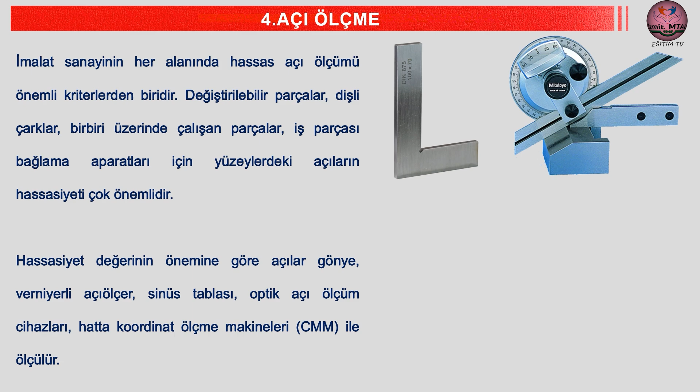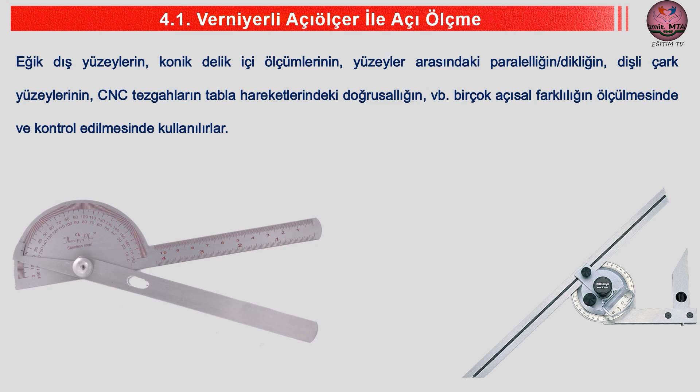Verniyerli açı ölçer ile açı ölçme. Eğik dış yüzeylerin, konik delik içi ölçümlerinin, yüzeyler arasındaki paralelliğin, dikliğin, dişli çark yüzeylerinin, CNC tezgahların tabla hareketlerindeki doğrusallığın ve benzeri birçok açısal farklılığın ölçülmesinde ve kontrol edilmesinde kullanılırlar.

Basit bölüntülü açıölçer. Bu tip açı ölçer genellikle markalama ve kaba bölüntüleme işlemleri için kullanılmaktadır. 180 derecelik ölçme aralığına sahiptir.

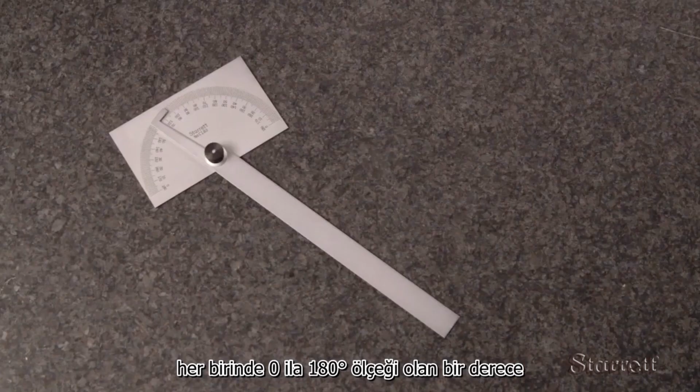The Starrett C183 steel protractor is a fairly simple tool which is great for determining or setting angles to within a degree. With a 0 to 180 degree scale in each direction, you can read both angles and supplementary angles directly. The flat back and square head add to its versatility.

You can use either side or the top against a reference surface to set or determine an angle. And probably most common, hold the bottom side of the head against an edge. The rust-resistant satin chrome head finish makes the marked graduations and figures easy to read. The lock nut securely holds the 6-inch leg in any position.

This aluminum block is being prepped for a machining center, but first we are going to lay out angles and cut off corners to shorten the cycle time. For each corner, use a rule and scribe a mark 1 7/8 inches from the end.

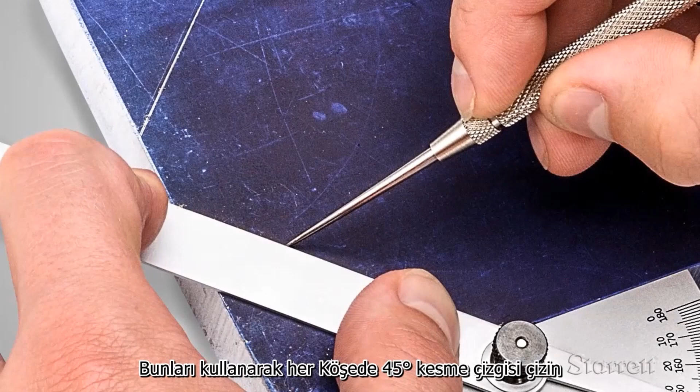Next, set the protractor at 45 degrees and lock. Then, using the rule mark as a guide, scribe a 45-degree cut line on each corner. Using these lines, you can safely cut off corners with a vertical bandsaw. After machining, each corner will have a 1-inch, 45-degree angle.

Here's another application. You can determine the included angle of a cutting tool tip by holding the blade against the tool shank and positioning the head against the cutting edge. The C183 is not the tool for inspecting precise angle tolerances, but it is accurate to within a degree, which meets many requirements.

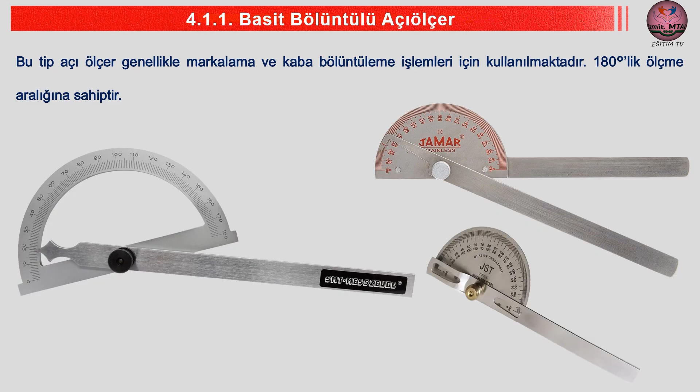Verniyer bölüntüsü, birer derecelik bölüntülere, diğer bir deyişle bir derecelik hassasiyete sahiptir. Büyük boyutlu olan basit bölüntülü açı ölçerler, Verniyer bölüntüsü 0,5 derece olarak da üretilebilir.

...54 derece, 126 derece.

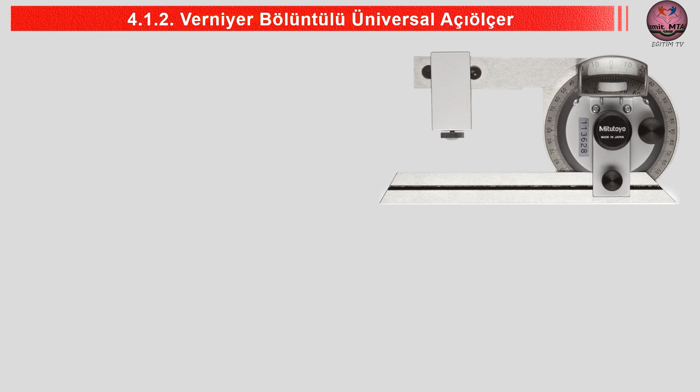Verniyer bölüntülü üniversal açı ölçer. Hassas açı ölçümleri yapmak amacıyla kullanılmaktadırlar. Çeşitli açı ölçülerinin elde edilmesinde ve okunmasında kullanılan hassas ve yüksek ölçme tamlığında olan bir ölçü aletidir.

360 dereceye kadar tüm açıların ölçümü yapılabilir. Dairesel açı ölçüm kısmı birbirinin devamı olacak şekilde 90 derecelik 4 parçaya bölünmüş durumdadır.

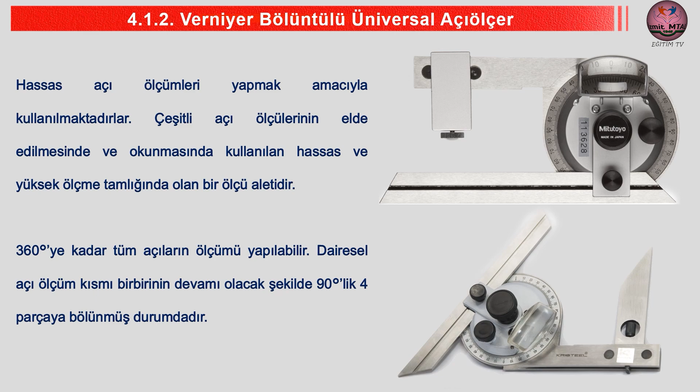Herhangi bir ölçmede elde edilen açının sabit kalması için sabitleme vidasından faydalanılır. Verniyeri 2 dakika ve 5 dakika olmak üzere iki farklı hassasiyette üretilmektedir. Dairesel verniyere bağlı ayarlanabilir açı ölçüm kolu açısal yüzeyle çakıştırılır ve sıkıştırma vidasıyla sabitlenir. Ardından açı ölçüm cetveli üzerinden değer okunur.

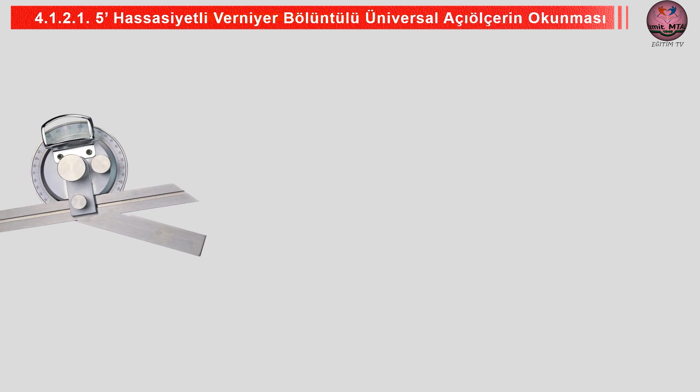Beş dakika hassasiyetli Verniyer bölüntülü Üniversal Açıölçerin okunması. Verniyerli kumpaslar ile aynı çalışma prensibine sahiptir. Açıölçerin hem ana cetvel hem de Verniyerinin okunması sırasında bölüntülerin ana cetvelde derece, Verniyerde ise dakika olduğu unutulmamalıdır.

Verniyer'in 5 dakika hassasiyetli olabilmesi için 23 derecelik açı, 12 eşit açı bölüntüsüne ayrılmıştır. Bu sayede 5 dakika hassasiyetli açı Verniyeri bölüntüleri elde edilir.

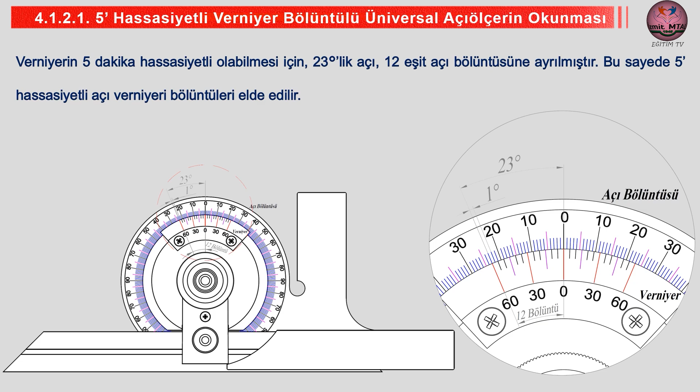Ölçülen değer eşittir: Verniyer sürgüsünün sıfır çizgisinin geçtiği ana cetveldeki açı artı, Verniyer sürgüsü bölüntülerinden ana cetvel üzerindeki bölüntü çizgileriyle çakışan çizgi çarpı hassasiyet.

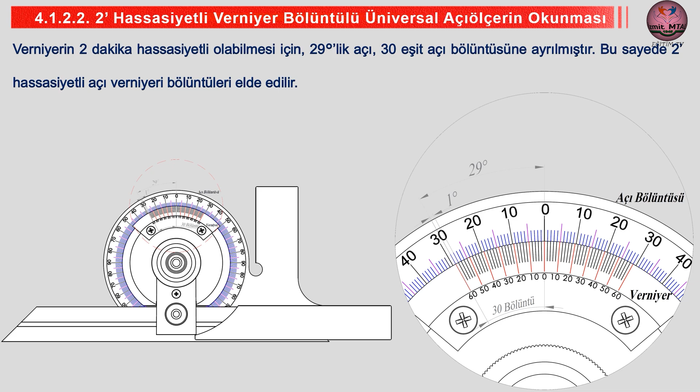2 dakika hassasiyetli Verniyer bölüntülü, Üniversal Açıölçerin okunması. Verniyer'in 2 dakika hassasiyetli olabilmesi için 29 derecelik açı, 30 eşit açı bölüntüsüne ayrılmıştır. Bu sayede 2 dakika hassasiyetli açı, Verniyeri bölüntüleri elde edilir.

Ölçülen değer eşittir: Verniyer sürgüsünün sıfır çizgisinin geçtiği ana cetveldeki açı artı, Verniyer sürgüsü bölüntülerinden ana cetvel üzerindeki bölüntü çizgileriyle çakışan çizgi çarpı hassasiyet.

40 derece artı 20 çarpı 2 dakika. 40 derece artı 40 dakika. 40 derece 40 dakika.

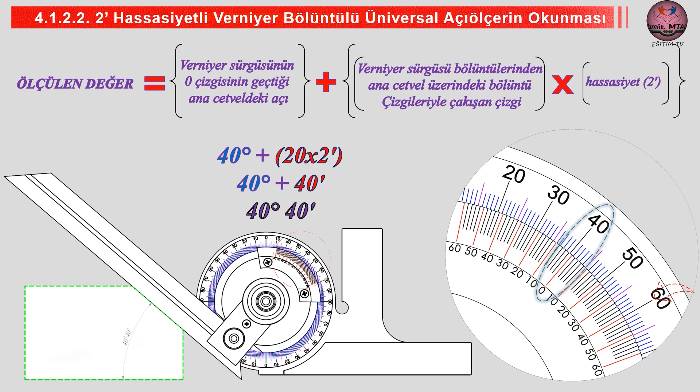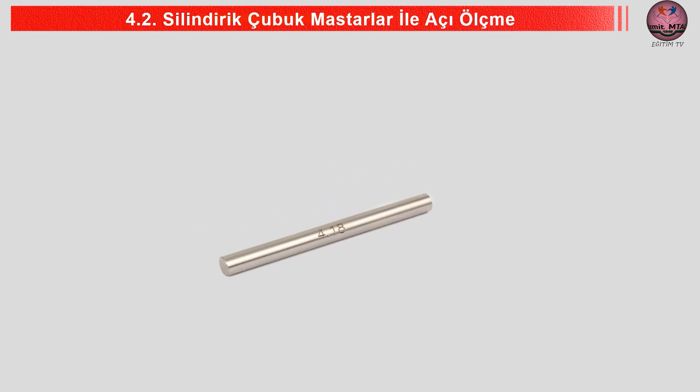Silindirik çubuk mastarlar ile açı ölçme. Silindirik mastarlar, iç deliklerin ölçme ve kontrol işlemleri ve kırlangıç kuyruğu ya da kanalların açı ölçümü gibi işlemlerde kullanılırlar.

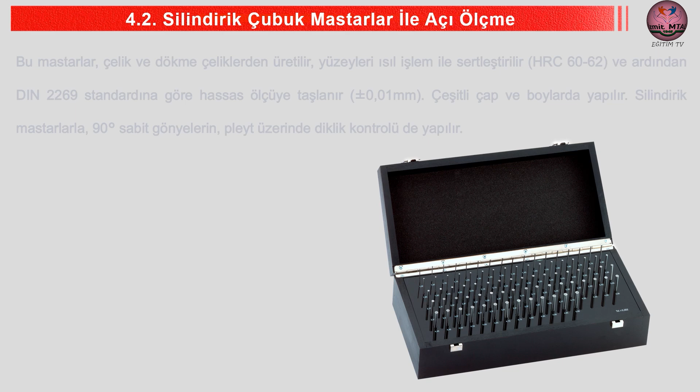Bu mastarlar, çelik ve dökme çeliklerden üretilir, yüzeyleri ısıl işlem ile sertleştirilir ve ardından DIN 2269 standardına göre hassas ölçüye taşlanır. Çeşitli çap ve boylarda yapılır. Silindirik mastarlarla 90 derece sabit gönyelerin plaka üzerinde diklik kontrolü de yapılır.

Mastar yardımı ile açı ölçümü için 2 adet farklı çap ölçüsünde silindirik mastara ve 1 adet blok mastara ihtiyaç vardır.

Silindir mastar yardımı ile açı ölçümü için aşağıdaki görselde gösterilen ölçülerin sırayla ölçümlerinin yapılması ve ardından tanjant fonksiyonu ile açının hesaplanması işlemi yapılarak açı ölçüm işlemi gerçekleştirilir.

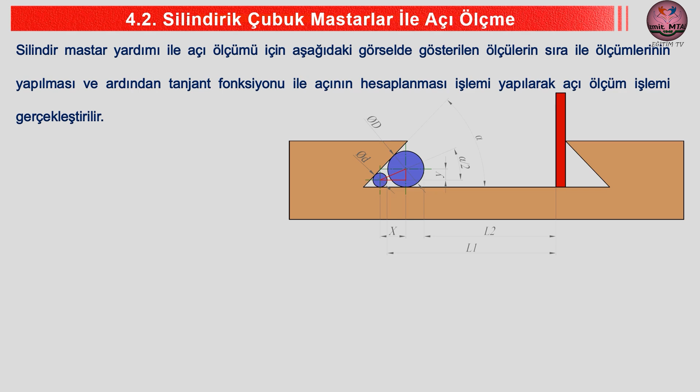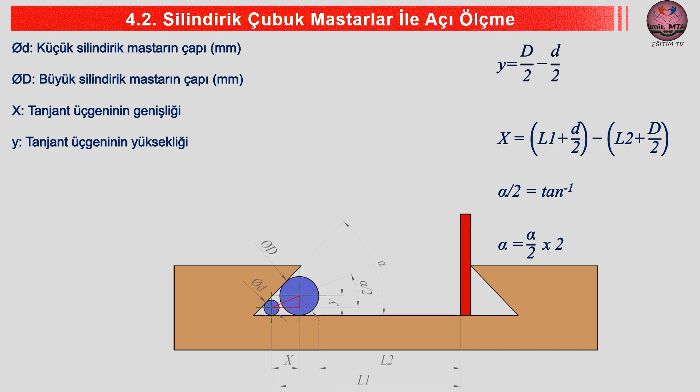d: küçük silindirik mastarın çapı. D: büyük silindirik mastarın çapı. X: tanjant üçgeninin genişliği. Y: tanjant üçgeninin yüksekliği. L1: küçük silindirik mastar ile blok mastar arasında en kısa mesafe. L2: büyük silindirik mastar ile blok mastar arasında en kısa mesafe. Alfa bölü 2: tanjant üçgeninin açısı. Alfa: ölçülmek istenilen açı.

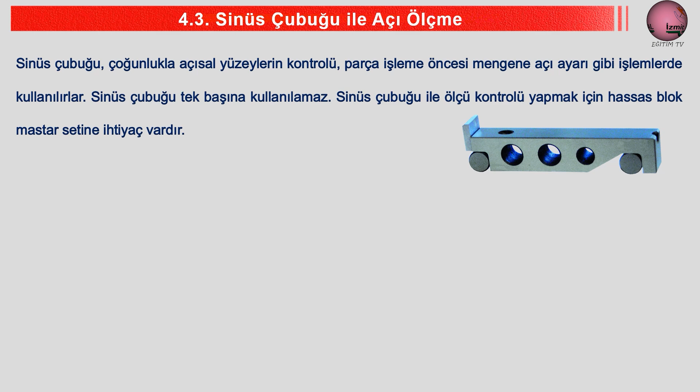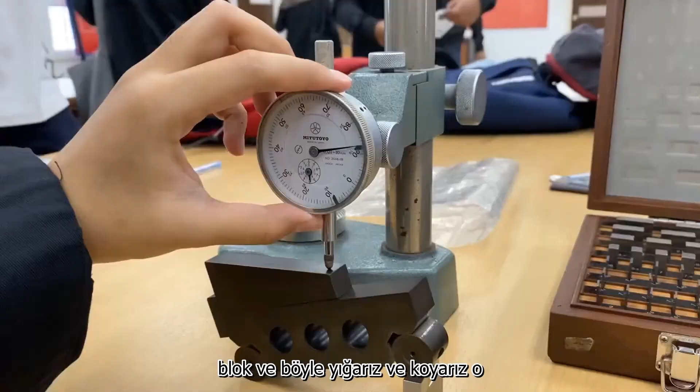Okay, so this is the sine bar and this is the angle gauge bar. Then we stack them together like that, and then we take the linear gauge block and stack like that and put it at the end of the sine bar, and then we rotate the dial gauge to 0, and then we slide the dial gauge slowly, and we repeat this experiment until the reading of the dial gauge is constant.

Sinüs çubuğu, çelik ve dökme çeliklerden üretilir, yüzeyleri ısıl işlem ile sertleştirilir ve ardından hassas şekilde taşlanır. Paralellik hassasiyeti 100 mm'de 0.02 mm. Diklik hassasiyeti 100 mm'de 0.05 mm'dir. Standart olarak 100 mm uzunluğunda üretilir.

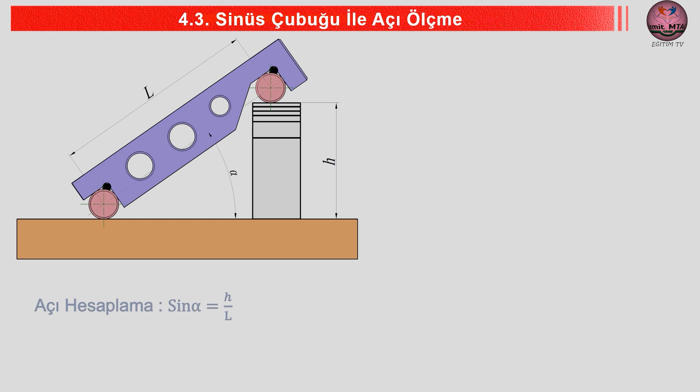Açı hesaplama: sin alfa eşittir h bölü l. Blok mastar yüksekliği h eşittir sin alfa çarpı l.

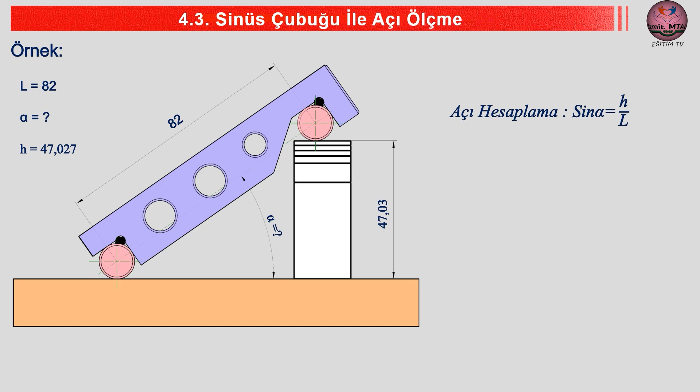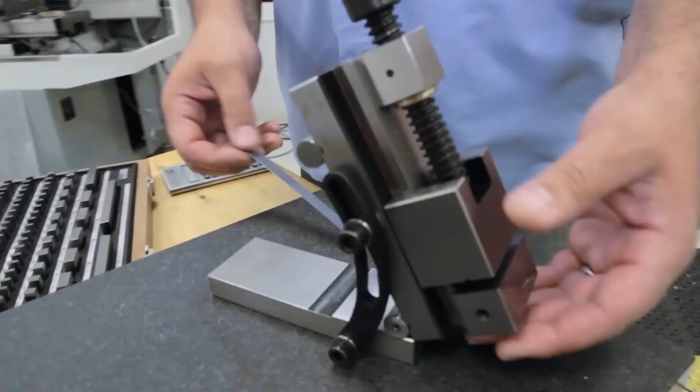To set the angle, the first thing you have to establish is what size your sine vise is. And to do that, you measure between the dowels, because that's what you're referencing. And this is a 100 millimeter sine vise.

So I take the angle that I want to set it at, sine of that angle, 20 degrees sine, times 100 millimeters. That will give me my stack up to produce that angle. It's 34.202 millimeters, and I have an imperial gauge set, so I have to convert that to imperial. Divide that number by 25.4 to get my gauge block stack up. That's my gauge block stack up.

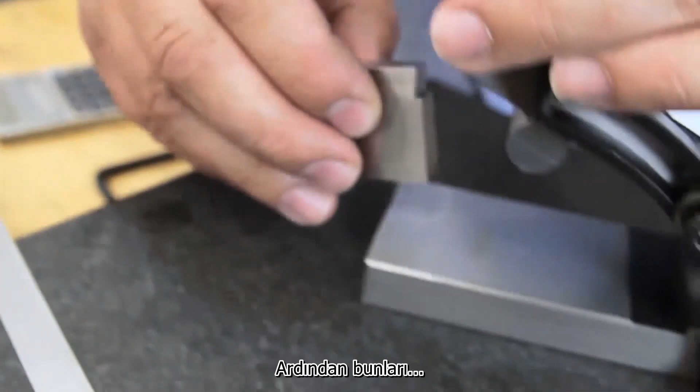Ring the gauge blocks together. And then place them under the dowel. After you have the gauge blocks in place, you can snug up your screws.

Okay, now that the angle is set on our sine vise, we're ready to load our workpiece and then load the vise into our machine.

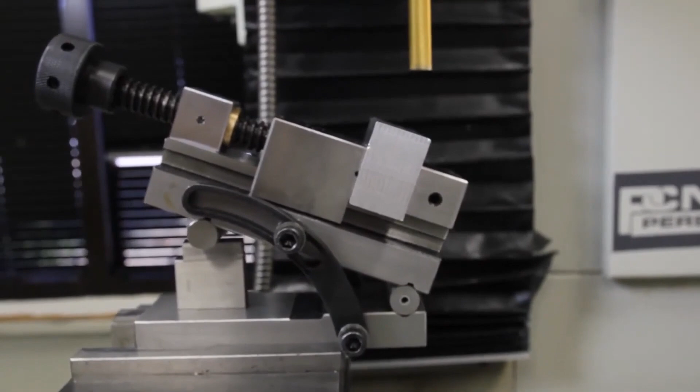And now our vise is set to 20 degrees and we can mill, do inspection work, drill holes, whatever we want at 20 degrees. And that's how easy it is to set up a sine vise.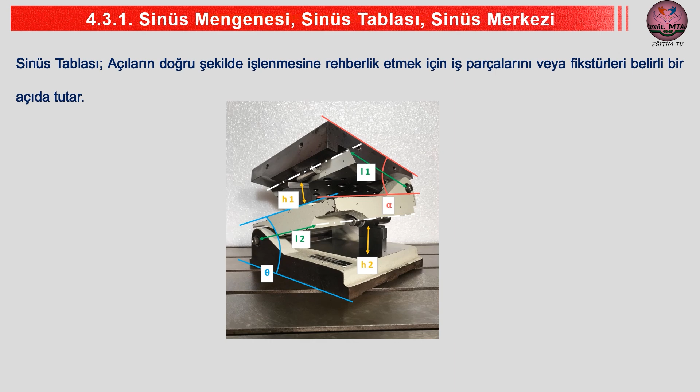Sinüs tablası, açıların doğru şekilde işlenmesine rehberlik etmek için iş parçalarını veya fikstürleri belirli bir açıda tutar.

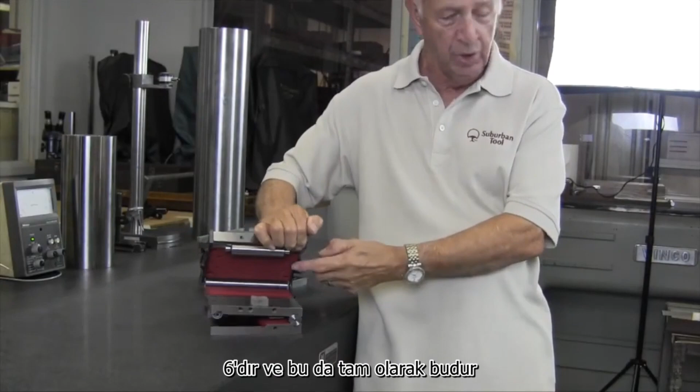This is a shipping pad. We're going to remove that, and go over to the other side to remove the other shipping pad, again making sure there's no dirt anywhere, so we have a good clean surface.

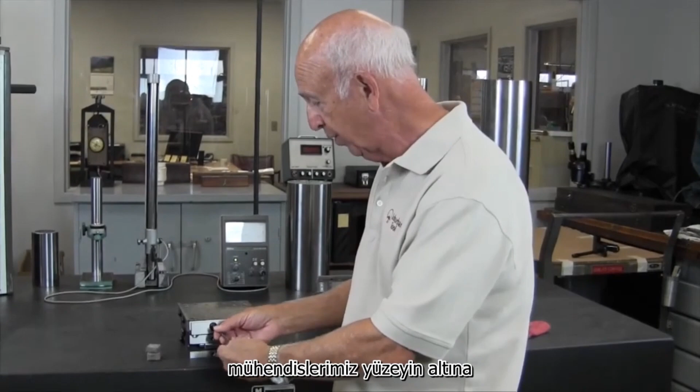We'll talk about why the Suburban Tool product happens to be, in our view, one of the best values for the money. The rails, which some people call stops, here and here, are retractable, so you can put them in a storage position by loosening two screws and dropping it down, and you can see it stores below the surface. Our engineers were pretty smart thinking about that, so you don't have to take them off.

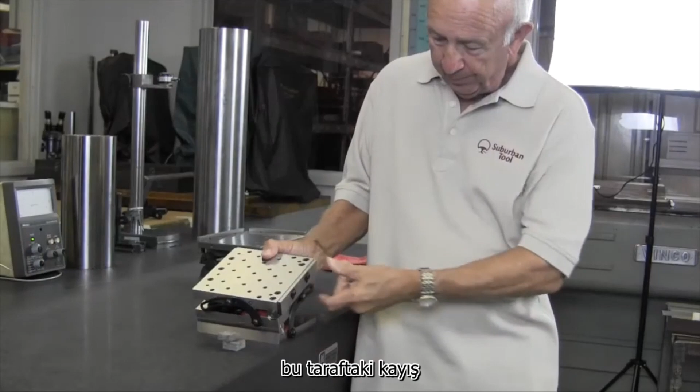The other thing that was important to us, or to our engineers - and by the way, our engineers are all tool and die guys, so as I am, so we know the importance of features to save you money - this is the locking strap on this side, and you can lock it in any position once you put your gauge blocks underneath it.

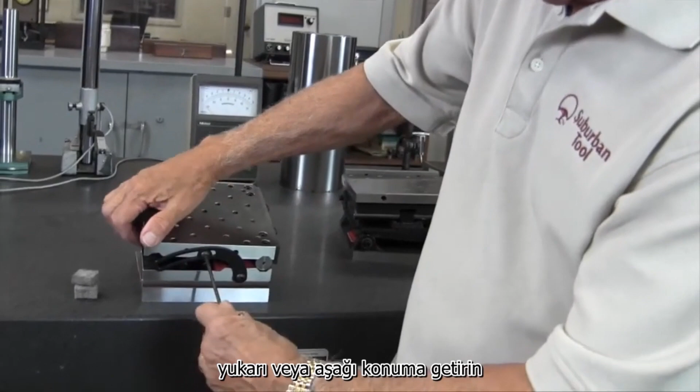You'll notice that the locking strap does not protrude above the surface, so it doesn't interfere with anything. You can see it here in a better view. So if I raise this other side up, or put it in the down position, it doesn't make any difference - it still does not protrude above the surface.

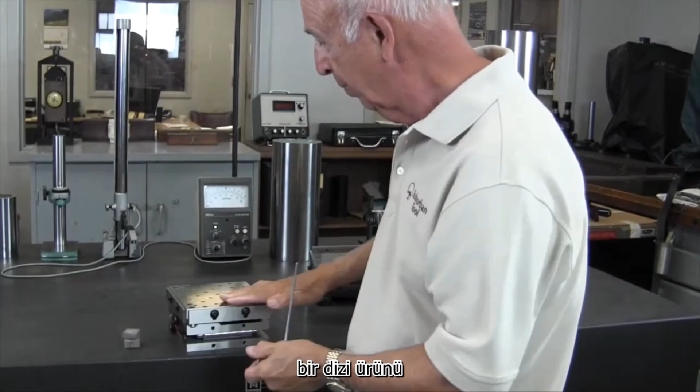It has a patented arc that we put into this locking strap. Another feature we like is that it has a series of tapped holes which will allow you to position a number of products on there, including many of the Suburbans. It's designed so that our sine set products, which are the vices, the V-blocks, etc., will all bolt right on here.

And they'll register up against at least one rail. There are 4 counterbored screws right here, two here and two here, which will allow you to take one of our magnetic chucks and bolt it on here. Now you have a magnetic sine plate.

Pretty cool, right? So that's the wrap up of the Suburban product. It's recommended for inspection, as in the inspection room. It's really what we call medium duty. It's also used for grinding, for surface grinding, and it can be used for drilling, etc., but we don't recommend it for any kind of heavy duty milling.

But we have an answer for that - the Excello product. Now, when we bought this company, we didn't change a thing. We bought the blueprints, the castings, the patterns, etc. We kept it all the same. To this date, we still make it identical to what Robbins did.

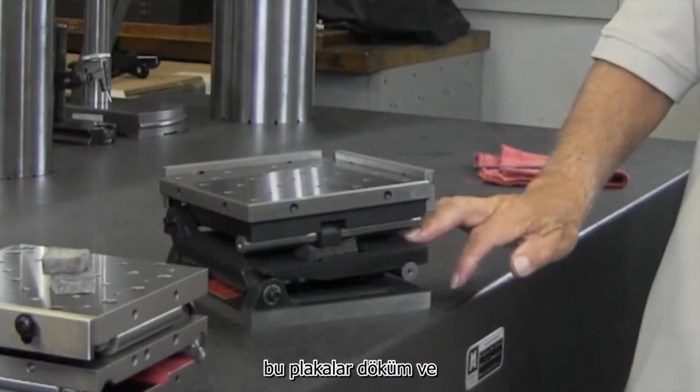A couple of the features that are important, and what makes the difference between the two, is the plates on this are cast, and they're cast steel. So there was an opportunity there to have some pretty good structure without spending a lot of money on machining. The other important thing is the locking straps.

You'll notice that the Suburban has a strap here, and the Excello does not have a locking strap. Instead, it uses the hinges themselves to lock, so it puts pressure in the downward position. So when locking the mechanism so it doesn't move - and I'll show you what I mean by that in a moment - it puts pressure towards the gauge block or the work surface, which is right here.

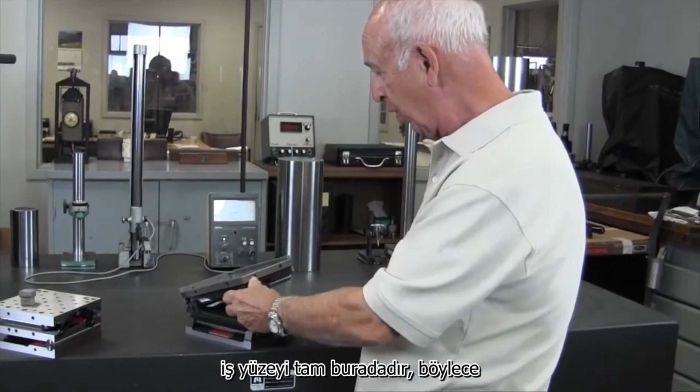So your gauge blocks go under here. If you put gauge blocks in there - we got a gauge block around here somewhere - thank you, Jim, we got a 1-inch block here. Now we're going to stick it under the pad. There's another difference here: you'll notice there's a precision pad here that's lapped, and a precision surface here.

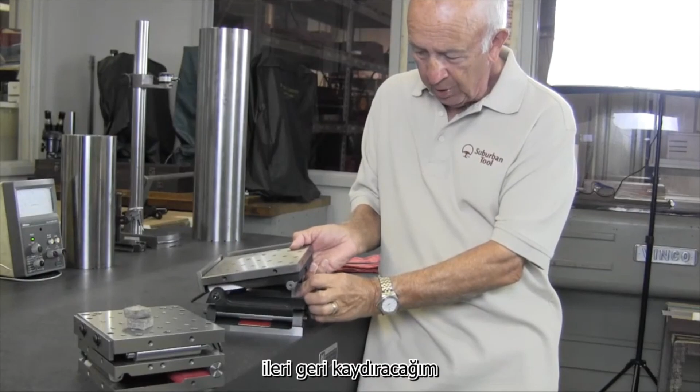So again, the importance of cleanliness - we're going to slide that on, slide it back and forth a little bit, make sure we get it into the right position, and now we can lock it down.

And the way we lock it, I think I should take this apart and show you what it looks like. You see that pretty good there, Glenn?

You notice that there's a taper on this bushing, and there's a female taper the same way inside the hinge roll. So the way this was designed is when you lock it, it expands the hinge roll and it locks it into the housing.

Now you might say, well, when you do this one on this side, it's going to go the other way, right? Wrong. This is a left-hand thread. So it too will put pressure going forward, which helps to secure the gauge block and makes it good and tight.

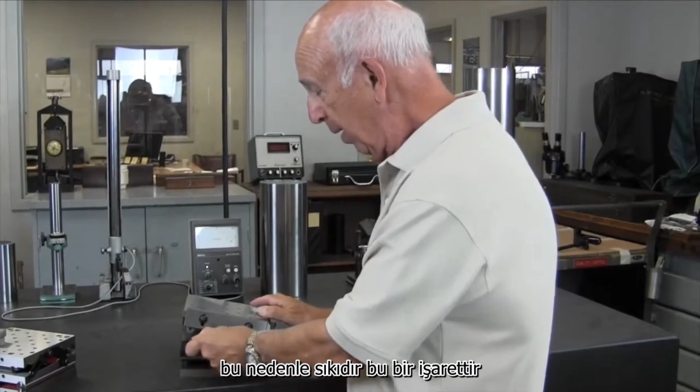For this reason, this is a sine plate that we recommend for heavy-duty machining, as well as for grinding and inspection. The tolerances are the same as Suburban tools. This is a much more complicated piece of equipment, and it has features here that Suburban doesn't have, but Suburban also has some features this doesn't have.

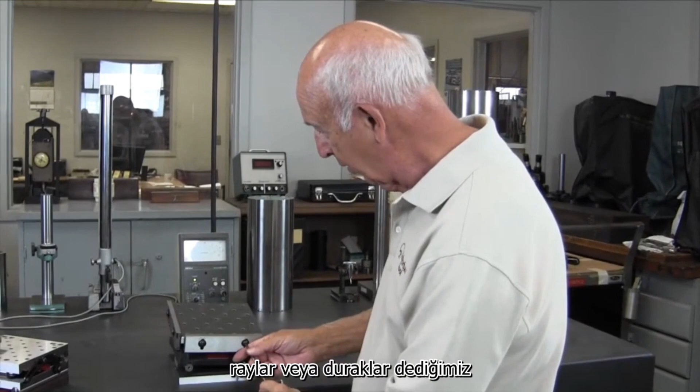As an example, the rails, or the stops as we call them, will drop down, but they don't go into a fully stored position. You can see that it sticks up a little bit.

Okay folks, so the difference between the two sine plates basically is the locking mechanism. On the Suburban product, our SPC66, or sine plate compound 6x6, we use a locking strap, which is a less costly way to do it. Whereas on the Excello Robbins, we use the hinge mechanism to lock it down, which is an expanding arbor, which is much more costly to construct.

So the idea of this is that, again, left-hand thread, right-hand thread, so when you tighten these down, it expands the arbor, locks the sine plate into position, then it puts forward pressure down on the gauge block, which gives it the kind of security that you need for a high degree of accuracy while you're machining.

You're going to get the same accuracy here, folks, but the difference is that this is not intended to be used on a milling machine, whereas this one can be used on a milling machine and anything else, and you still have a high degree of accuracy.

So I ran out into the shop and picked up a couple of sine plates that our sign crew's been working on. This is our Taft-Peirce model, as we were showing you earlier. We didn't have any in the finished goods department, so I yanked a couple out. I wanted to show you what they look like.

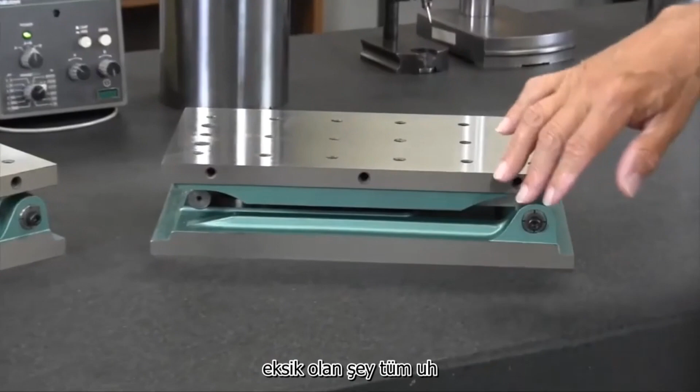They're still in process, not quite finished yet. What's missing is all the details - the edges have to be chamfered and the rails have to be put on. But I just want to give you an idea of what they look like. They have the same features as we mentioned earlier with the locking hinge, so you can lift it up and again, you can lock it.

We have the same features of tolerances as far as being square, parallel, flat, all within 2/10. Beautiful product. Green is good.

Every product that we make comes with a guarantee that it's going to be exactly as we describe it. The tolerances are going to be the same. If you ever have a problem with it, send it back to us, we'll take care of it. Can't imagine, but things happen in shipping, who knows. Anyway, well folks, what'd you think of that?